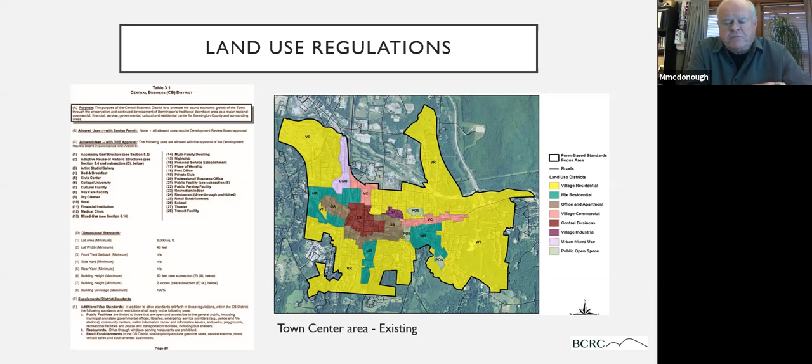Kat, could you just, for John and Susan's benefit particularly, go back and be a little more descriptive about the other zoning districts that we're focusing on? I think I'm going to do that in just a second, Michael, if that's okay. All right, that's fine, I just want to make sure. Well, Susan probably hasn't had the opportunity to be familiar with zoning maps. Yeah, if it's okay, I'm going to address that in just a second so that it's closer to where we can talk about what the actual changes are.

So we've already gone over that the land use plan, which has broader policies that guide development, directed the Planning Commission to undertake this project. And the project is to develop form-based standards.

Why form-based standards? What are form-based standards? What form-based standards or form-based regulations do is they emphasize the form that new development takes over the specific types of uses that are allowed. Historically, planning has focused on use and segregated, physically and geographically, uses based on trying to limit public nuisances that would occur, noise levels, pollution, such things as part of the Industrial Revolution. But as public health codes and building codes have increasingly addressed those kinds of nuisances over time, you're actually able to have mixed uses, and mixed uses actually create the most dynamism and economic development and resilience over time.

So over time, we found that moving away from regulating very specific uses in an area is advantageous, but at the same time, you do want to regulate form, because form really defines the physical built environment, which has huge impacts on how pedestrians feel safe and engage with the built environment, how inviting it is, for example, especially in your downtown, to actually bring people out on the street, to make them enjoy the streetscape and enter shops.

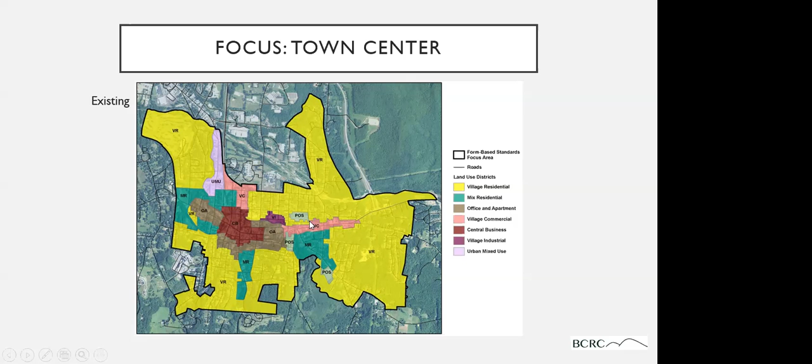So we're not actually including that. It should be 7 zoning districts in the town center. So what we're proposing is consolidating this down, in the spirit of simplification, to 5 districts.

And we do that by combining 3 of the districts. Again, this is the urban mixed use along Benmont. We have village commercial around North Street, village commercial on East Main, and village industrial where the Energizer complex is.

Really, moving forward, the uses that the Planning Commission has settled on and imagined for these areas in the future are pretty similar, and continuing to divide them and segregate them doesn't really make sense anymore. So it's a proposal to consolidate them as a mixed use district and have the allowed uses in that area be pretty similar moving forward. So that takes us from 7 existing zoning districts down to 5.

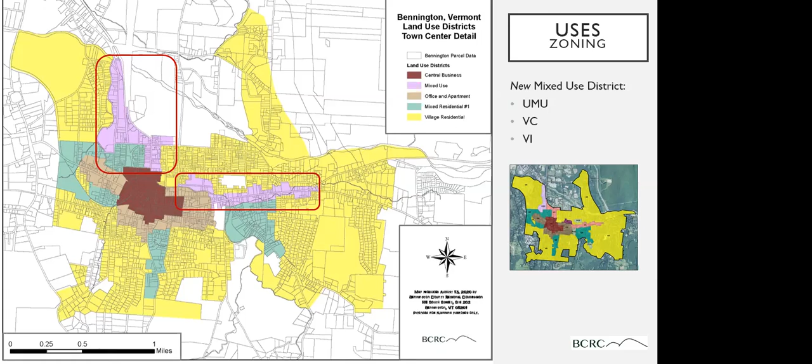And then complementing the use regulation is this form regulation. So as I said at the top, we have a downtown form-based area, a transitional form-based area, and the neighborhood residential.

These lines are totally consistent with what the zoning districts are. The downtown form-based area totally corresponds to the central business zoning district. The transitional form-based area is totally consistent with the newly proposed mixed-use district and the office and apartment zoning district that's around the downtown. And the neighborhood residential form-based area is consistent with the mixed residential and village residential use areas.

So again, I want to show you guys how we took the current regulations and started with these to come up with the new ones. We didn't start from scratch - we really just converted what we already have and tried to make it a little bit clearer. As I said before, this mound of text can be easy for some people to read, but is not necessarily easy for a lot of people to use.

But when you dive in, you can see that we have use regulation here. There's very specific uses of what's allowed, down to the detail of a dry cleaner versus some other kind of retail establishment versus a personal service establishment. Then you have a really broad permitted use like mixed use. So we realized we wanted to see if we could consolidate those down a bit. And then you do have form standards, and then you have a mix of both.

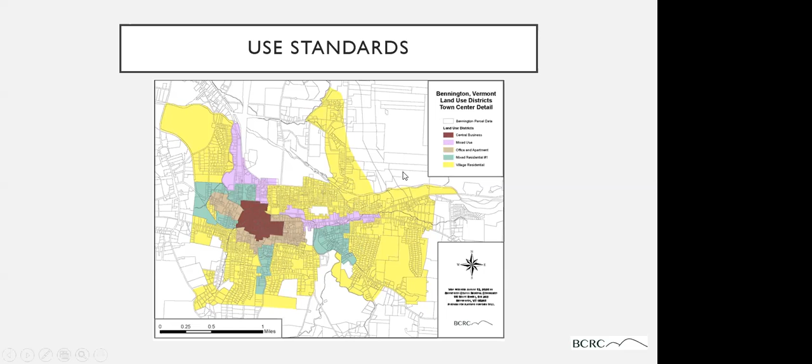So we started with these, but we paired them out into a use category and a form category. So we're going to go first through the use standards. Here again is the geographic area that this applies to. We have these 5 zoning districts where uses are regulated.

And here's a summary table for these use permissions. We have the 5 zoning districts here, and we have our consolidated use categories here - residential, commercial, public and institutional, and manufacturing. And then you can use the matrix to identify what the use permission is, to develop, say, a multifamily in the central business district.

Something really useful to note with this new write-up was also that the Planning Commission wanted to help clarify some existing standards that aren't necessarily communicated effectively in the existing regulations. One of those points is that if there is an existing building and a person proposing a development is not going to make any major changes to the building, but simply wants to do a change of use, that relatively straightforward procedure can be approved with just zoning administrator review and approval. So that's what this table communicates.

However, if you look at what the ZA permission means here, it does point out that for any new structures or substantial expansions in an area, even if it says ZA, new construction or substantial expansion does require Development Review Board review and approval. The Development Review Board is a citizen board that reviews development proposals. So we hope that's a little bit clearer to reference here, because that wasn't made very clear in the existing standards.

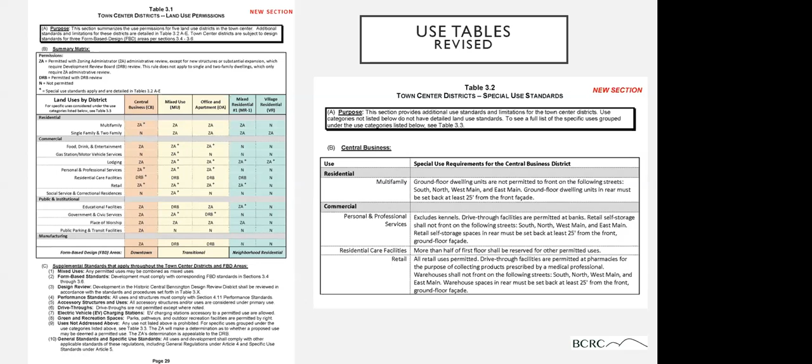What you can see with this summary is that it's been color coded, so it gives you at a glance an idea of what form-based standards you need to reference for each of these areas. This color coding is consistent with the maps, the form-based maps, and the sections of standards, so you can use those color codes.

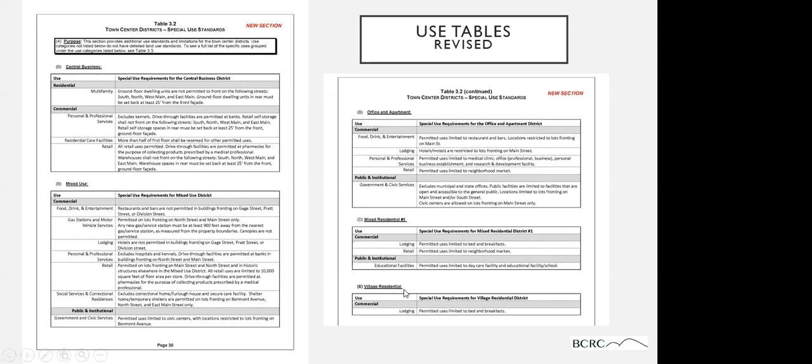Here's the rest of those additional use requirements. We looked previously at multifamily dwelling development in the central business district, but we have the rest for the remaining four districts: central business, mixed use, office and apartment, mixed residential 1, and village residential, that you would reference if they have additional standards that apply.

I've mentioned that we consolidated the uses when we first did a survey of how many use categories, individual uses, were regulated in the town center. It was about 47 individual uses that were regulated. We've consolidated those down to just 14 categories.

The point of categorizing them is that regulating a use matters when there are predictable impacts a certain type of use can have that you might be concerned about—a certain noise level, a pollution level, or a lighting level. You want to flag that type of use to know you need to think about that area of concern.

When you group these down, you get to put several types of uses under a category already flagged for the concerns you might have. For a gas station, you're going to be really concerned about traffic flow in and out because of all the cars, and similar uses will have that same concern level. So in formatting the regulations, this is much more consolidated, simplified, and easy to navigate than addressing each and every one of these uses for each zoning district.

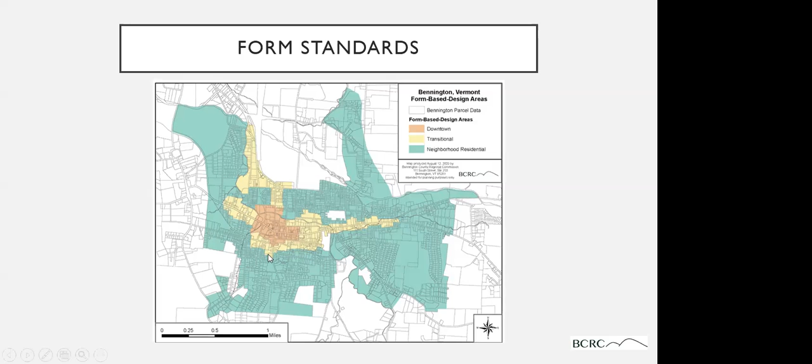So that was a quick overview of the new proposals for uses. Now we're moving on to the form standards. Here are the geographic areas: we have proposed a downtown, a transitional form area, and a neighborhood residential form area.

Starting with the downtown, we begin each of these areas by talking generally about area principles and characteristics. This is really helpful for instances where a development review board is required for some development—there's a 'fit with the character of the neighborhood' criteria that the DRB can rely on, so this helps spell out what some of those criteria are.

For example, this form area should have high density and pedestrian-oriented development, varied building architecture and character, dynamic sidewalks and storefronts, lots of green spaces and parks, multiple stories and active rooftops, and green stormwater management.

You can see the standards are formatted so that individual standards that are helpful to illustrate are called out and labeled. For example, A indicates that connectivity throughout the town center for pedestrians, by way of sidewalks and other pathways, is important. Here we've indicated an alleyway meant to take folks on the sidewalks out to a rear parking lot, because parking lots are not permitted to front directly on main streets in the downtown. So those types of connectors are really important in the downtown.

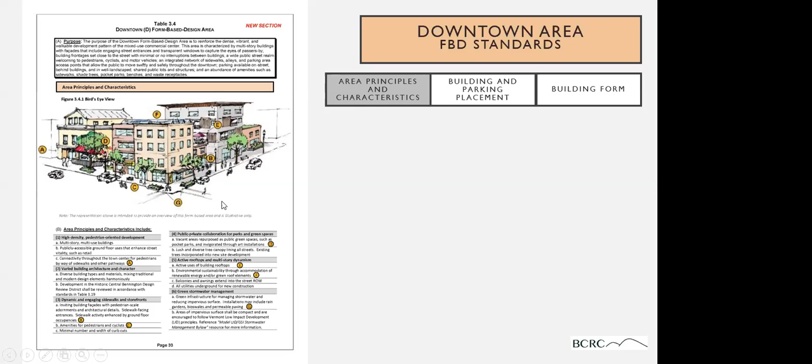Then we move on to building and parking placement, and the types of standard categories that are really important here include lot sizes and lot coverage, building frontage, setbacks, what types of yards are allowed in front of a building, and parking direction.

Something important to note here is this term frontage. A lot of people are not familiar with what frontage is, but frontage is the percentage of a lot line, a front lot line, that has to be covered with building. So you can see here that at Main Street, we're requiring 100% lot frontage, meaning this lot line needs to be met with building 100%. You can see all of these buildings here, for example, comply with that.

Now, once we get off of Main Street and we're on a side street, that drops down to 60%. You can see an illustration here of what 60% lot frontage looks like in comparison.

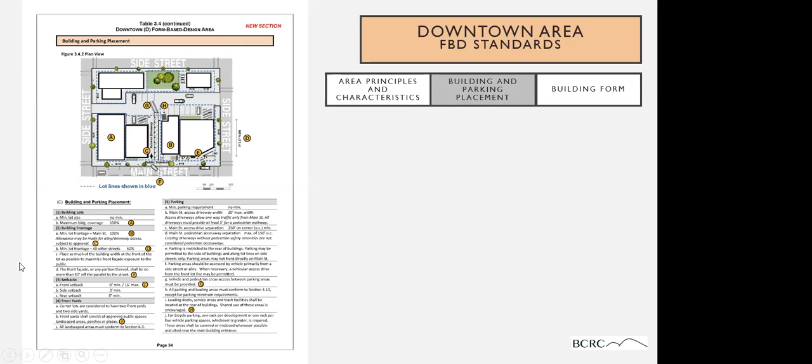What's the point of this regulation? It really is to create a nice, dense downtown that people enjoy walking through. They feel it's a little bit urban, it's very exciting. They don't have to walk too far to get among several different storefronts, or walk up to their apartment where they live. That's a really good way to encourage the dense type of development we want in this area.

So now moving on to building form, we have criteria like building height, encroachments into the right-of-way such as balconies and awnings. We did outline some municipal standards for the public right-of-way and amenities like sidewalks, street trees, and street furniture. In addition, I mentioned glazing before, so we've called out minimum thresholds for glazing in different areas, and we break it down by if you're on Main Street versus a side street, if you're the first floor of the building or upper stories.

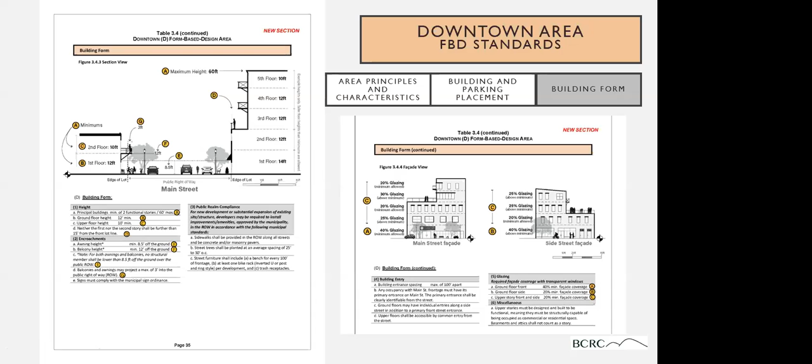You can see those minimum thresholds here, and our graphics designer indicated them here, but sometimes the glazing that's indicated is exactly at the minimum threshold, and sometimes it's above it. Because with all of these being a minimum threshold, you can always have more glazing than the minimum, but we want to make sure that the buildings do have a minimum glazing.

So that was the downtown, the first of the 3 form areas. This next one is transitional.

Again, beginning with area principles and characteristics, we've moved down slightly to medium to high density development. It's not quite as dense as the downtown, but we still have complete streets that are accommodating all kinds of users, not just motor vehicles, but also pedestrians and cyclists. These areas do tend to follow the gateway areas into the downtown, so Benmont Avenue, Main Street, and North Street. We really want traffic to be flowing very safely and effectively through these areas.

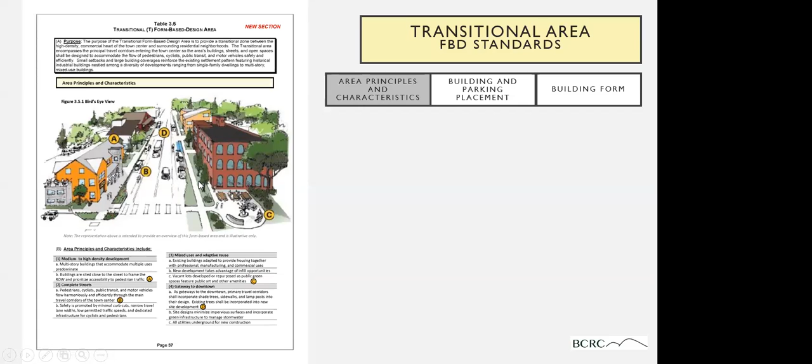Building parking and placement: again, we've got building lot sizes, their frontage, setbacks from the lot lines, what can be in people's yards, what types of yards are allowed, and parking regulations.

An important takeaway here for this form-based area: something that the Planning Commission did decide to retain from the existing regulations is that even though this is one form-based design area, they decided it was important to retain some different setbacks by use district. So you can see here that for the mixed use district, you're allowed to build buildings up to the lot line, whereas in an office apartment district, to distinguish it from the downtown, there is a minimum 10-foot setback.

So those are the kind of details that you want to pay attention to, but hopefully these graphics help illustrate so that you don't feel like you have to dig through all of this text to get at those kind of details.

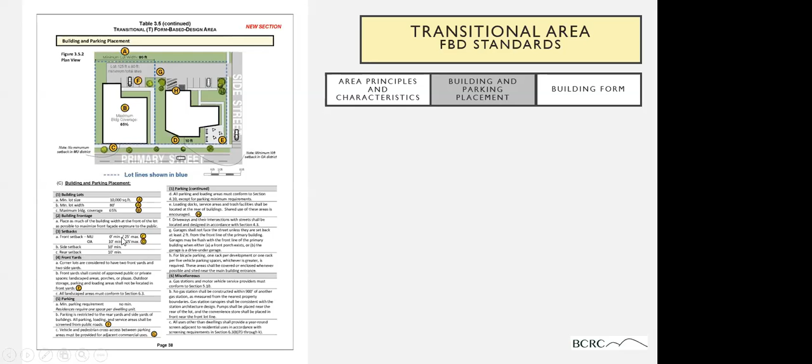And for the transitional area, again, we have building form, building height, the encroachments, the public realm amenities, and glazing, you can see over here. Again, we have some distinctions in form between the mixed use district and the OA. For example, in the mixed use area, 1-story buildings are permitted, but they do have to meet some minimum roof pitch requirements. In the OA, it is a minimum of 2 functional stories. You can see that here.

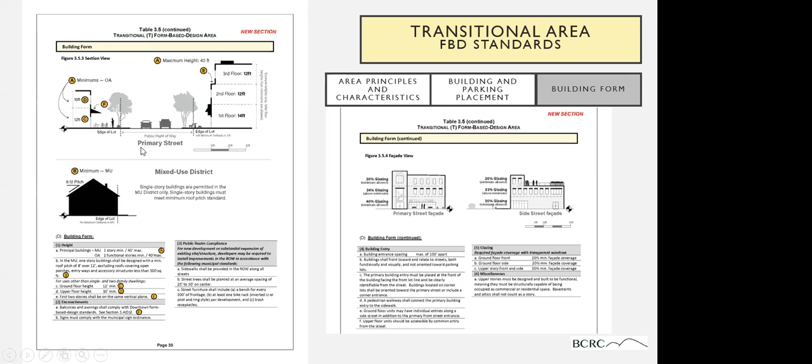Yeah, that's the transitional area. And so the final form-based area is the neighborhood residential area. Characteristics include compact, walkable development in these areas—not super high density, but still enough density that folks can reasonably walk from point A to point B, and feel there's a safe neighborhood quality to the area.

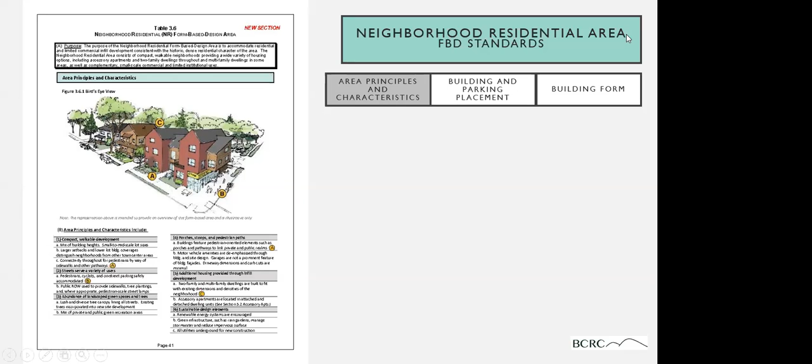Streets again serve a lot of users safely. There's green spaces and trees. Importantly, porches and pedestrian paths are encouraged to make people feel safe and like this is a walkable area. There's a large emphasis on infill housing being developed that stays consistent with the existing settlement pattern, but can hopefully fit in additional housing units efficiently.

You can see as these graphics—it's really nice when you can look at them all in a document together. You go through the series and you can see how density is increasing when you see what these setbacks and lot coverages look like in practice. You can really see how density scales down through these areas. That's one of the intentions with these graphics, so people can see what these regulations do in practice. Glancing through and comparing to the other graphics, you should see that we have a lot more green space between buildings, but we're still relatively densely settled in this area.

Minimum lot sizes and frontages, setbacks, parking—similar to everywhere else.

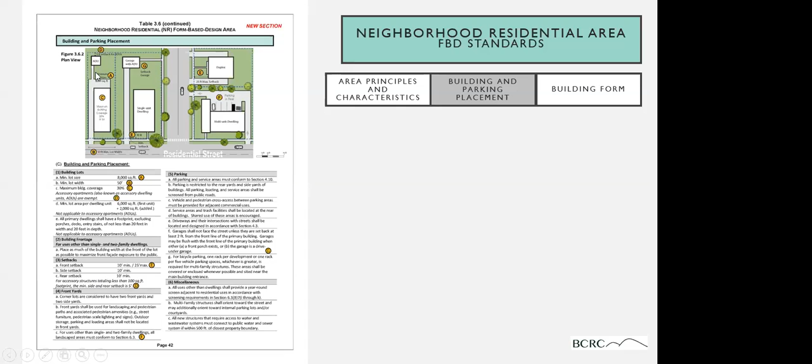I'll call attention to the fact that because we're encouraging accessory dwelling units and accessory apartments to be developed in this area, while there are some standards and regulations on density and setbacks, there are notable exceptions made for ADUs. For example, with this label D, it corresponds to this label down here for accessory structures totaling less than 100 square feet—really small economy apartments. They can have a reduced minimum side and rear setback of just 5 feet, whereas in the rest of the area, all other buildings require a minimum 10-foot setback. This is intended to encourage people to identify opportunities for infill development, so you want to keep an eye out for those exceptions for accessory dwelling units.

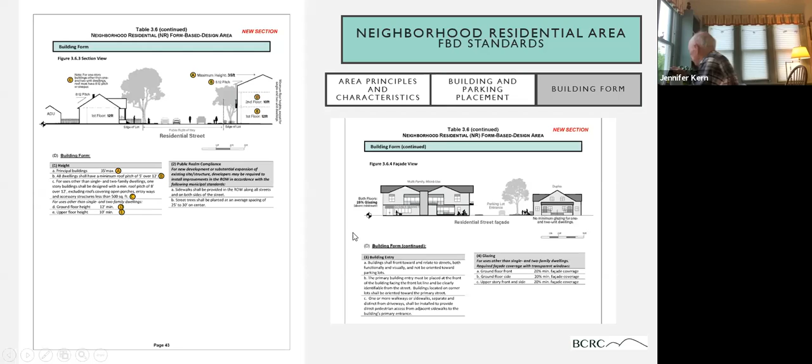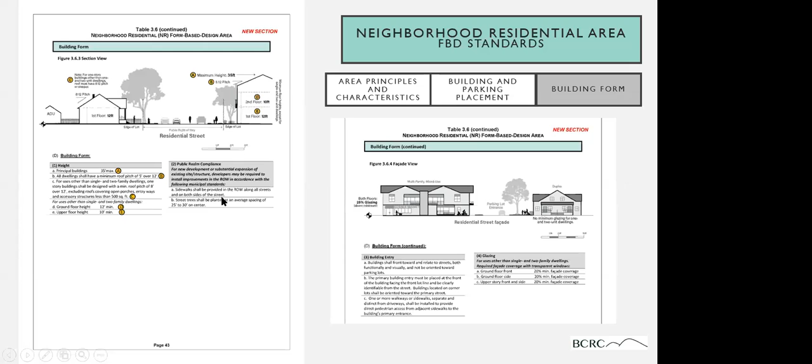And onto the final section, building form for neighborhood residential. We again have these height indications—no minimum story, a 35-foot max, which I believe is pretty consistent with existing regulations, as a lot of these are. You want to pay attention that single and two-family dwellings are often exempt from certain form regulations. So throughout this section, you'll see that for a lot of things, they apply primarily to multifamily dwellings, and if there's an opportunity to develop, say, a corner store, it would apply to those developments.

And so that's it—those, when you look... can you guys hear me? Yes. Okay, just had all of your screens go black, but if you can hear me, we're good.

So those are all of the standards. If you look at them online, that's the full packet. Again, the takeaways to go through quickly: the regulations we've just gone through are designed to take the place of the standards for 7 existing zoning districts. We're consolidating the zoning districts just slightly—really not a major change in practice from 7 to 5 zoning districts. The use categories have been consolidated quite a bit more. What that means in practice is not that uses are more restrictive—really, they are less restrictive than the existing regulations. There are new form standards, 3 new form-based design areas in the town center, with graphics and illustrations that hopefully make them a little more digestible and understandable to your average citizen.

And so this is when I pass it off to Dan if he wants to talk about next steps, or we can just talk about any questions that John or Susan have.

I think it would be most efficient at this time to just see if we have questions, and at the end of the meeting I can certainly talk about the next steps in the adoption process, but I know that's not exciting stuff, so let's see if there's any questions.